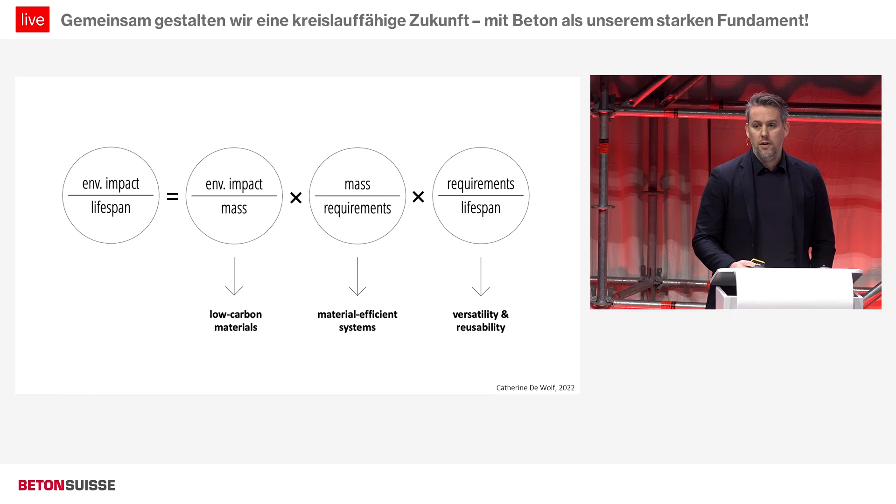It's also about how much material we need. There's a statement from my colleague at ETH that we should reduce by three-quarters, for example, in concrete. And the last point important to me is that we don't just do beam counting today, but that we really think of the end of life and the multiple lives of a building.

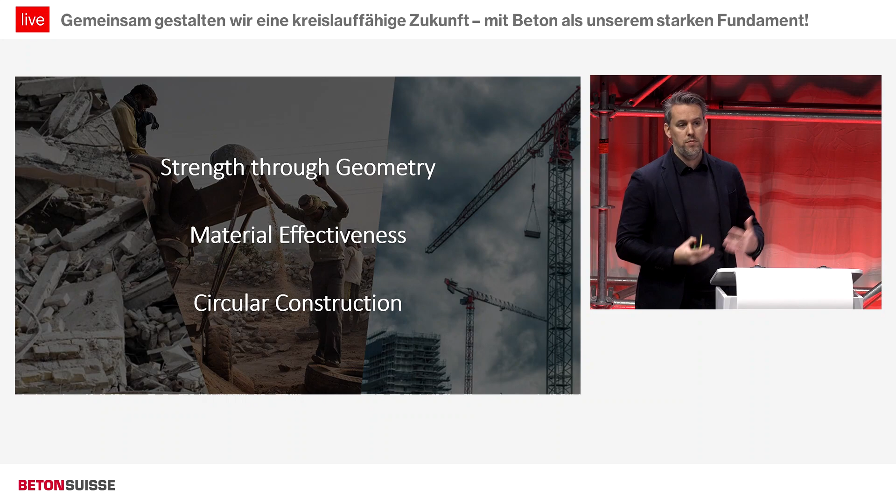That's also what Clemens has been talking about. How we've addressed this in our research group is through strength through geometry. You'll see what that means and why it makes sense for concrete construction. Material effectiveness, not material efficiency in the sense of lighter is better—if you achieve lighter with high impact, high emission materials, you're offsetting what you're doing.

And then the last one: I'll talk about how we achieve circular construction, very pure circular construction. So, strength through geometry—I'll first show you two projects that are actually masonry projects, but it will all come together, and you'll see that I was maybe talking from the beginning in concrete. So I work on this.

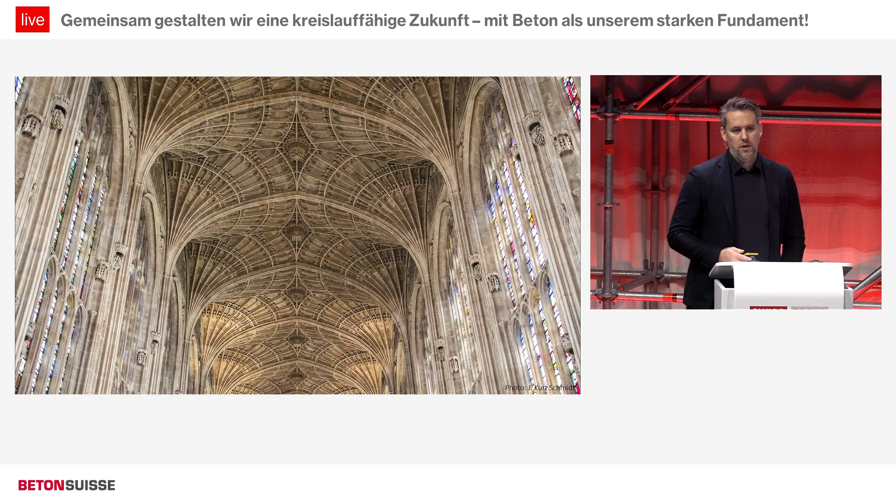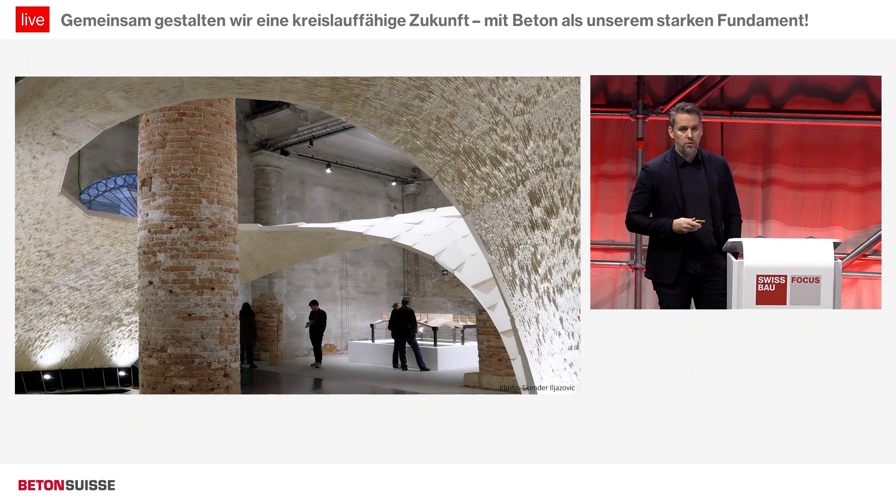I understand historic structures. I develop tools to understand why they're standing—they're literally as thin as an eggshell. And so we do projects like these. This was at the 2016 Venice Biennale, where we have 399 pieces of cut stone held together just because of their geometry—no glue, no mortar, no reinforcement. Very simple stones held together because they have the right geometry. So the first thing I want to say is indeed the beauty, but also the strength of geometry to really significantly reduce the mass, the amount of material needed to achieve a certain span.

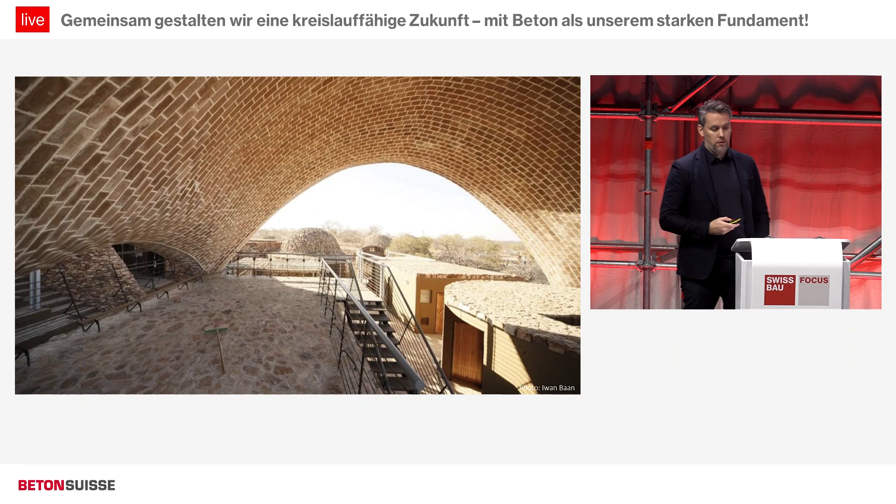A second project, where I did the engineering, from Peter Rich Architects in South Africa. This is a project out of soil, and these are 18-meter spans. What's special here is that we wanted to just use local materials and local resources, so local labor. We used the soil we found on site, added only 7% cement to stabilize that soil, and then did manual pressing so there was no energy put into the elements.

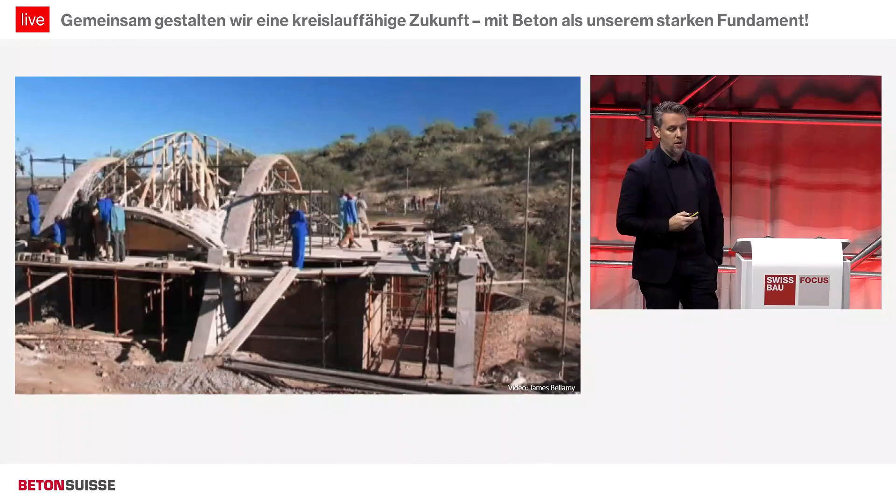What's interesting is that this technique we introduced didn't need any formwork or scaffolding, so we could use local labor. But the reason I'm talking about this project is the contrast between those two images. The elements, these bricks, are designed to only take 2 megapascals in compression—if you don't know what that means, it's 10 to 15 times less than a regular standard concrete in compression. But if you take one of those elements, you can just break it in bending in your hand. So you'd never consider this a structural material, which is why they have to be brought on site in very small packages.

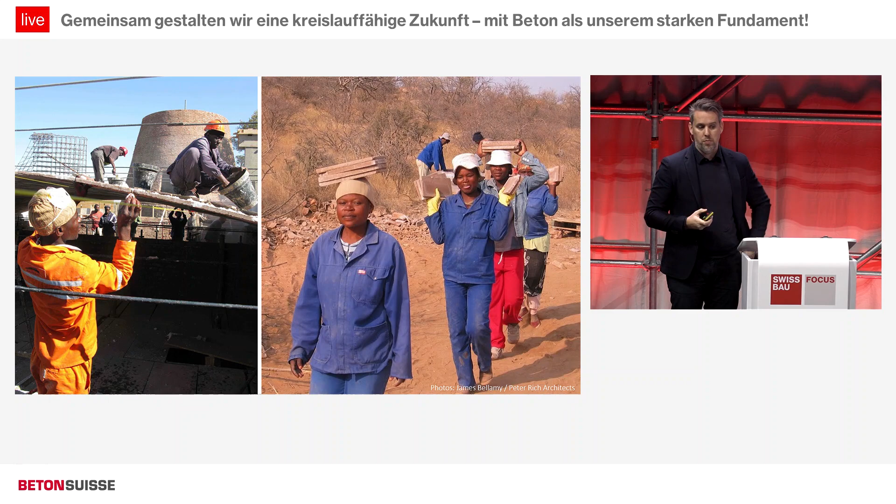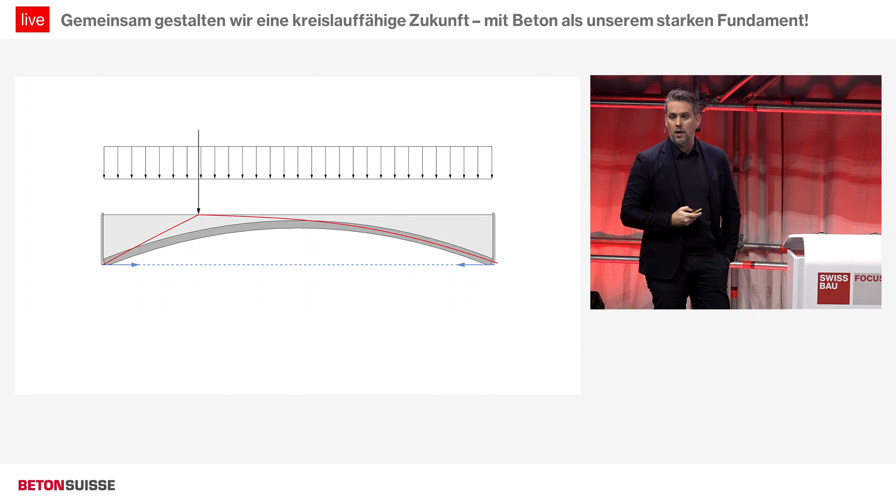And if you add a tension tie—why I'm showing you this is these historical systems that we see in our basements, in historic constructions—actually what we just did in the last 20 seconds is achieve an equivalent, 100% the same performance as a continuous reinforced concrete floor plate or slab, but one that uses 70% less material, right?

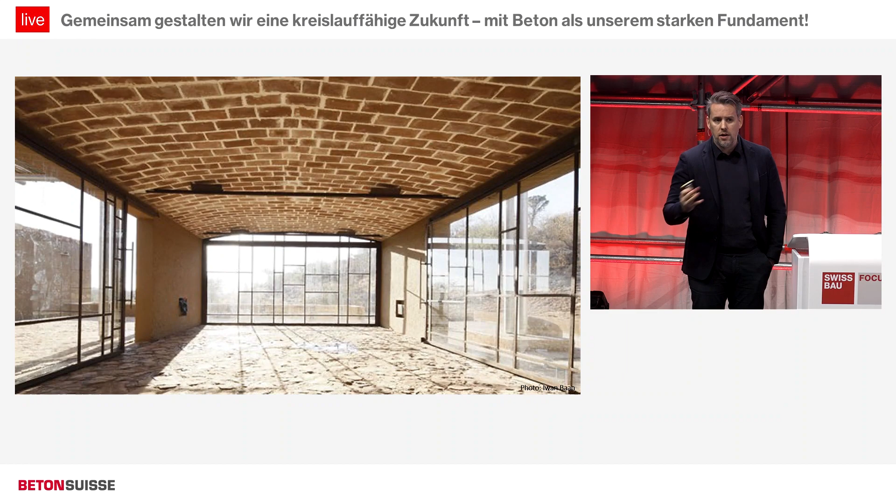So this is exciting. But the key thing here, why I wanted to show this project, is that if you get the geometry right—if you get strength through geometry—then basically you get very low stresses. You can actually activate low-strength materials, and these low-strength, recycled, or local materials are typically one-to-one: the stronger a material needs to be, the more stresses we have in it, the more carbon footprint that material has, right? So now we have two reasons to care about geometry.

We can at the same time reduce mass and reduce the stresses, so we can activate local recycled material very well. Another thing we are facing today—this is not my vision of the future, not my ideal scenario, but it's a reality—is that we are densifying, that we have to go taller.

So these kind of buildings, these medium high-rises, we see it also, for example, in Zurich. There's many towers, Wohnungsbau, and so on being built. When you look at these buildings, this to me as a structural designer was mind-blowing to learn, that actually if you look at the distribution of mass, of weight in this building, then 3/4 of this weight is in the structure. So totally absurd. The structure is there to keep itself up, not us, the users. We are part of what is called imposed loads. We, the users, are only 2% of the mass in that building.

If you then zoom in a bit more, you actually see that it's the floors, this element that we need to walk on, that is the most material intensive. That actually makes sense, right? Gravity comes down, columns are vertical, so they're perfectly aligned. We have decades of research on understanding how to brace our buildings very, very efficiently, so that is also perfect. But then I showed you that naturally the forces want to go to the supports like an arch, and we have a thin element, and this mismatch causes exactly this.

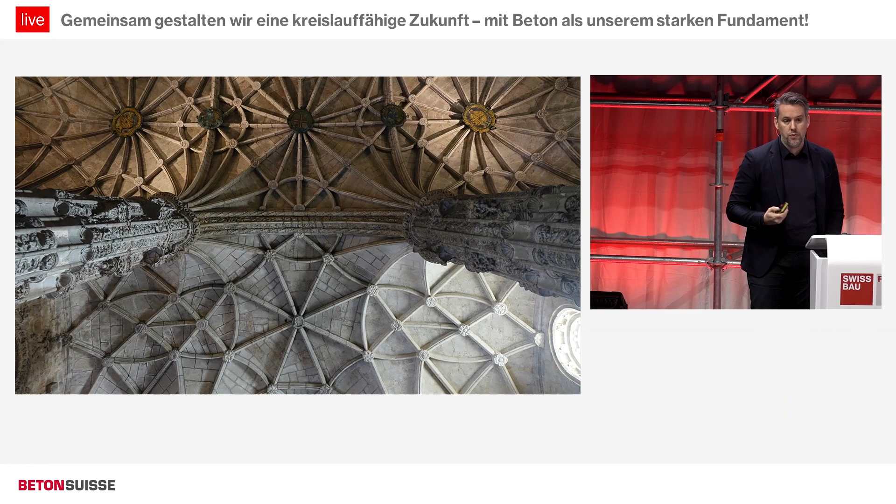And yes, this is what you get. So I focused on the weight, on the material savings earlier. But instead of forcing a material to be in a geometry that it naturally does not want to be as a compression-dominant material, but you reintroduce the natural, vernacular, historical kind of logical geometries, then you get this for free. This is only looking at the structures, so 70% of concrete you could reduce and 90% of steel. So it's not about changing materials, it's actually about listening to what the material wants to do and how to use it best.

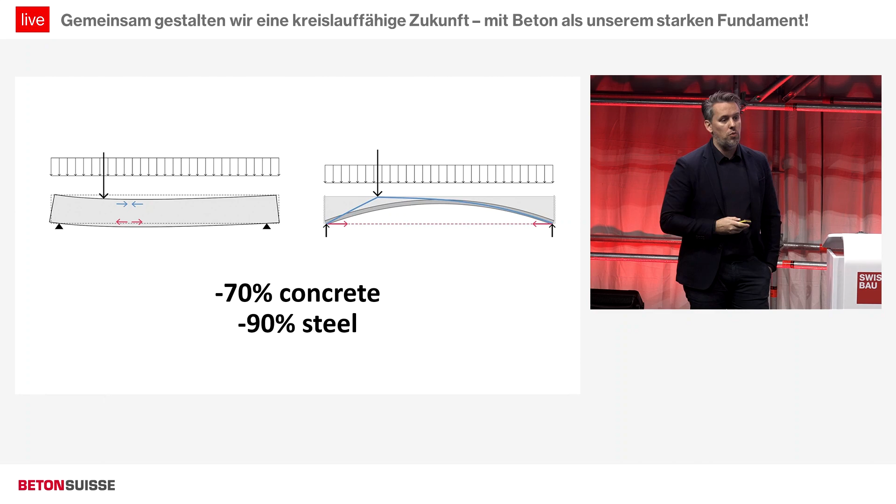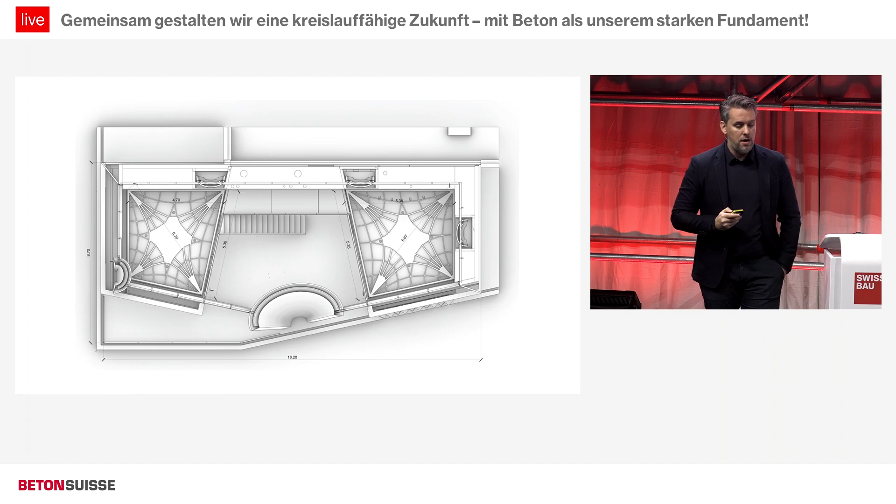And when you visit, then you learn about these floors. You heard about how we call the floors, the Rippmann floor system. So in this specific unit, you can go visit it in Dubendorf at Nest, is 5 by 5 meter spans. But what's exciting is that the structural thickness of the floor is only 3 centimeters. More, it's 3 centimeters of low strength, unreinforced concrete with more than 50% of recycled content in this floor, right? So 3 centimeters. So I hope you go visit Nest, and when you're walking on top, realize again that you're walking on almost no material.

All right, so this is a nice project. We were very proud. It looks neat and so on, but it was still in a bubble. It was still done in very special conditions. The reason why I passionately talk about these kind of concepts is, let's go back to this picture. And let's indeed look at what we have here. We already talked about 40% of the mass is basically in the floors, right?

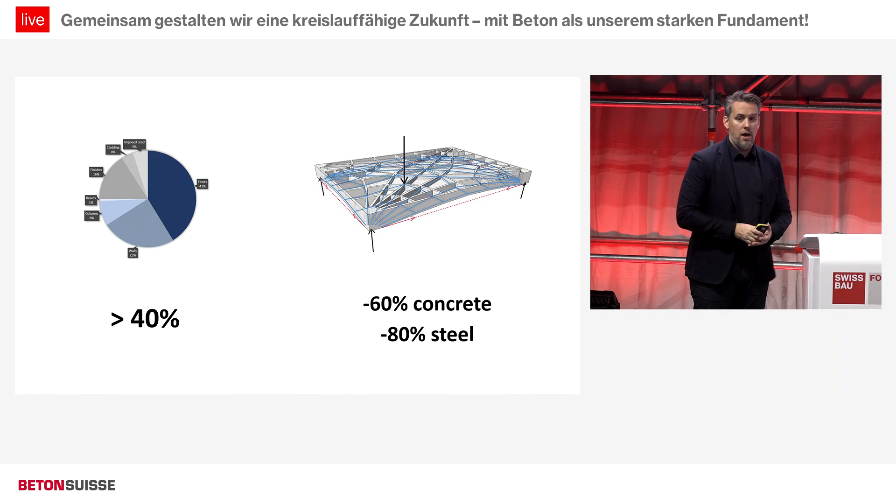So that is a lot of improvement to do by just optimizing one element. We will then also have the benefits on the right. You see it's not 70-90 because this is a medium high-rise, so we have fire safety requirement, we have acoustical requirements and things like that, so we add a little bit more material back into the project. So what would happen if you use the principle that I'm sharing with you today instead of your standard reinforced concrete floor plate? You would save on this one building 7,500 cubic meters of concrete, which translates to 1,200 concrete trucks that would not have to go to this one building site.

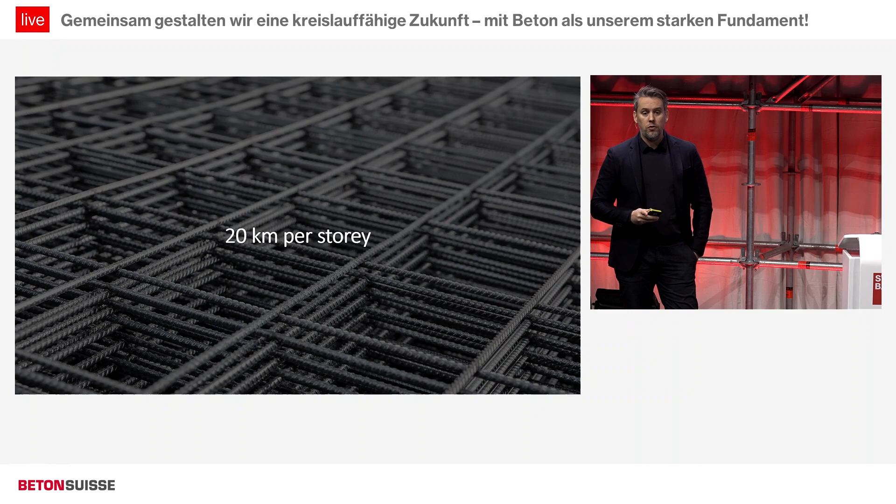But also per floor, you would save, and this really becomes the bottleneck, 20 kilometers of reinforcement steel, which nicely and coincidentally rolls out from Zurich all the way to Brussels for one building, right? I happily live and work in Zurich, but I'm very proudly from Brussels as well, so maybe you can tell where the example comes from.

All right, but in the beginning I said, let's not get carried away. It's not about material. So for example, all saying that wood is the solution and concrete not, it's absurd. It's 3 bubbles that we have to equally balance. The same here, I should not be excited about the volumes. What really matters is the combination between the material, how much material we use, the M, and what the impact is of the material.

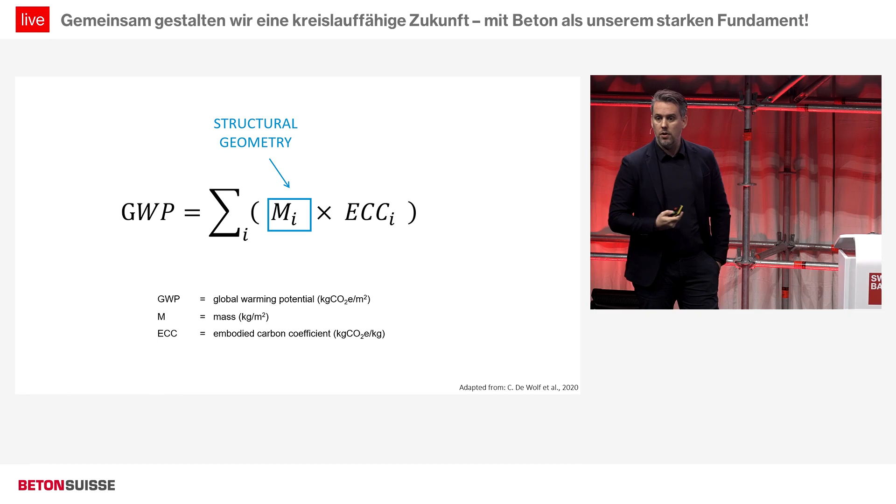So how does this work for what I've been showing here? So the structural geometry directly gives you this cut. Remember the stone vault that I showed you. But also, we can use better materials, and so actually getting the geometry right gives you that as well. And then, of course, I collaborate, indeed a long-term collaboration with Holcim, to get the best materials, to add that on top of that, so that we really also have the best material possible. So for our floors, this is how it looks like.

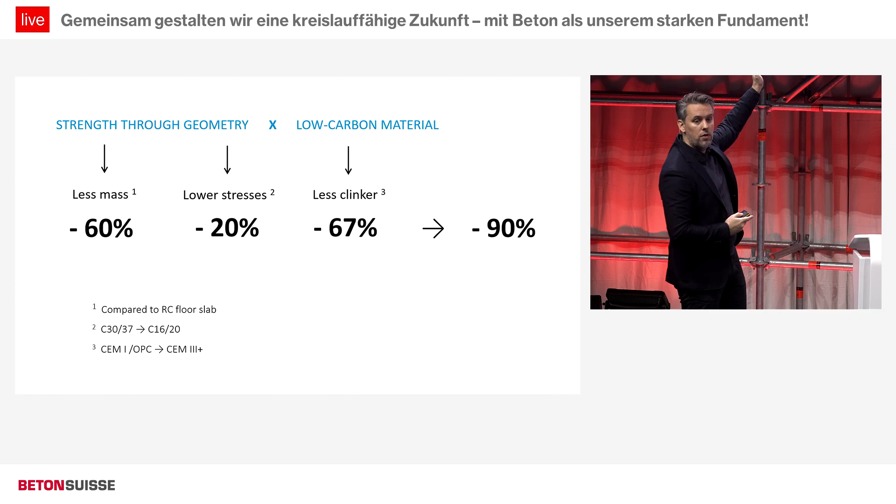So strength through geometry, so getting the right geometry, compression geometry for this compression-dominant material, gives you directly the mass cut, but also in our projects, we use lower strength concretes. And look what happens when you go from a C30 to a C16. You have an additional 20% of savings, and then state-of-the-art today in concretes that have less clinker in their cement, we can easily get an additional 2/3 on the material level.

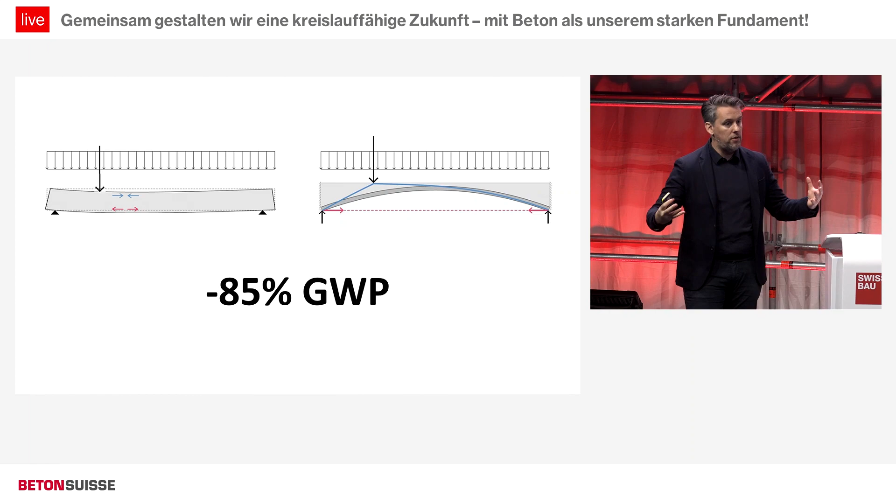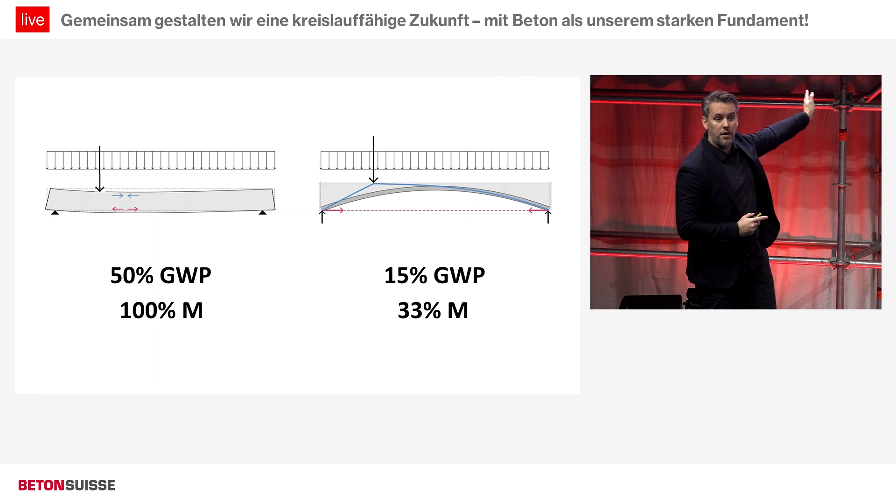So that means that what I'm presenting is not like a small kind of benefit. Even though we save only 60% of the weight of the building, we basically have 85% of the global warming potential reduced. So this is getting exciting, right? This is really changing the needle, and we're doing it with this exciting material indeed. So here also to emphasize again, if we would just change the material, then of course this is still nice, a 50% improvement, but all the rest stays the same. The volume stays the same, the mass stays the same.

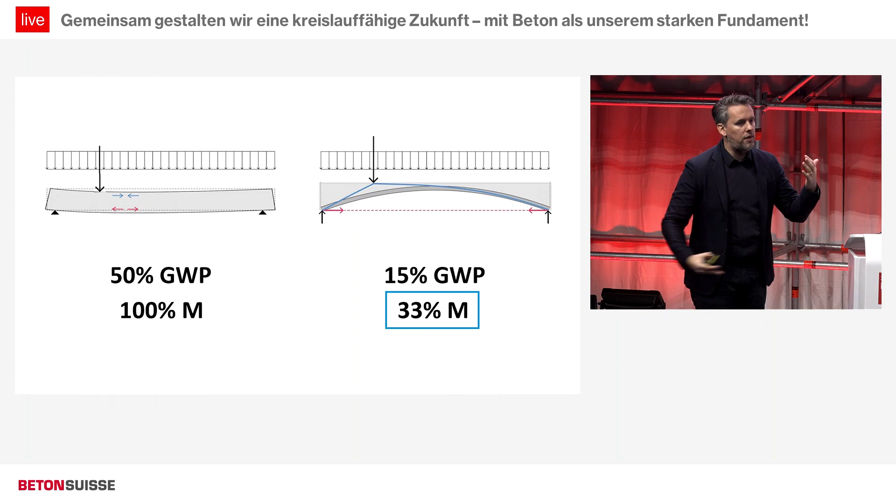And that is actually a key thing, because sustainability typically means automatically it's more expensive. But here, because we have these gigantic savings in weight, that means smaller columns, smaller foundations, so all the savings in the rest of the building make it that we can offer all of this sustainability at cost neutral for the investors, the clients. So that is starting to get exciting, and that is, at the end of the day, typically what really matters. All right, let's now go to circular construction and bring it all together.

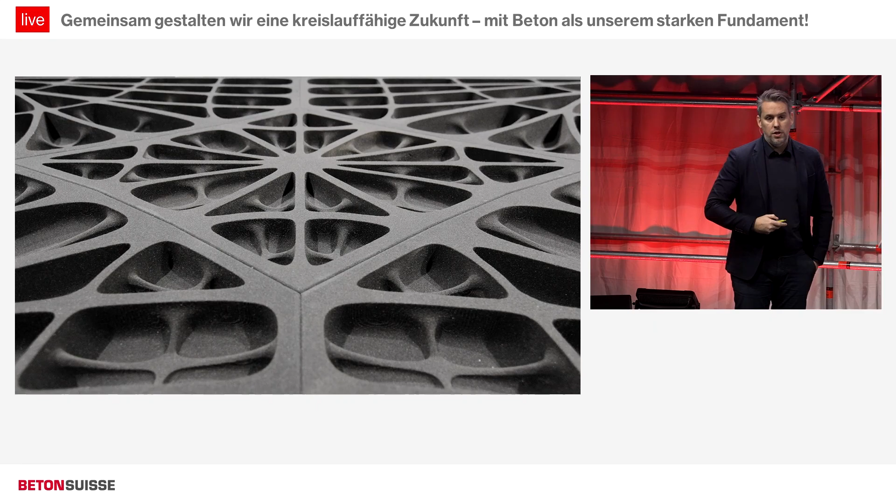So in the HiLo project, we did it in a one-off, so now we're developing this discrete floor plate, which is called the rib-vault floor system. It's prefabricated, so that it's easy and fast to install, so you can make some money there as well. As I mentioned, we can use low-strength, low-carbon concrete. What is also important here is that we are very disciplined in separating the materials, meaning that if we cannot just reuse the elements, we can easily recycle it. Why am I even talking about reusing? That is because we put the elements together as easily as a masonry system, so you can take it apart as well.

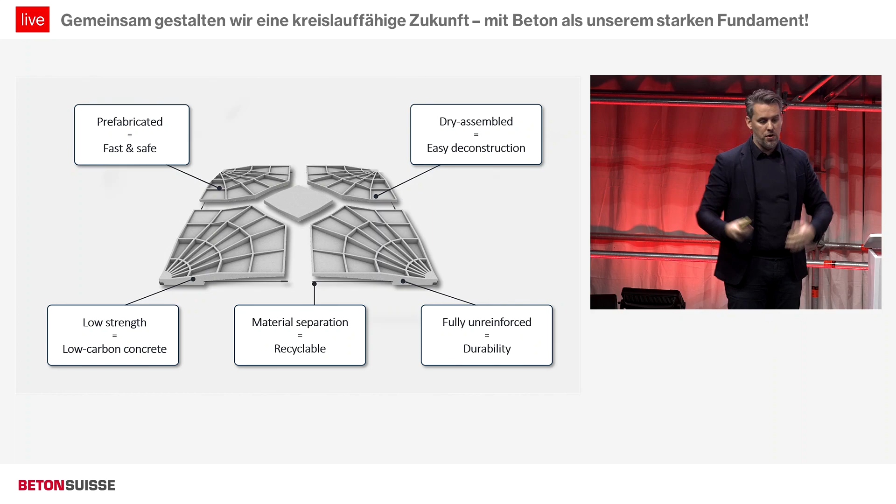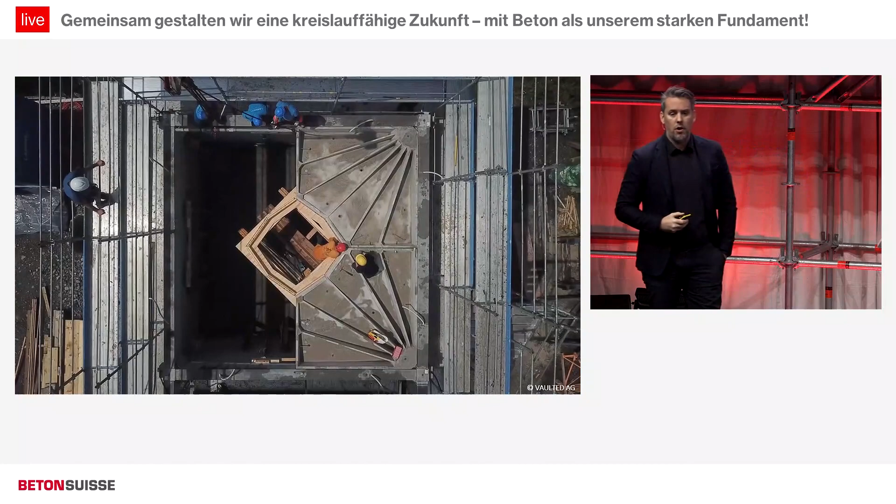All right, so this is how the early prototypes looked, but now with the ETH spin-off Vaulted, we are commercializing this, and we have already 4 active projects here in Switzerland, and I will show you one. This project, this is actually a mock-up, a full-scale mock-up, so not a prototype, a one-to-one test run for the building. This is for the Creatower 1 project by Tech Cluster Zug in Zug. The architects are Gigon Guyer, engineers Walt and Galmarini.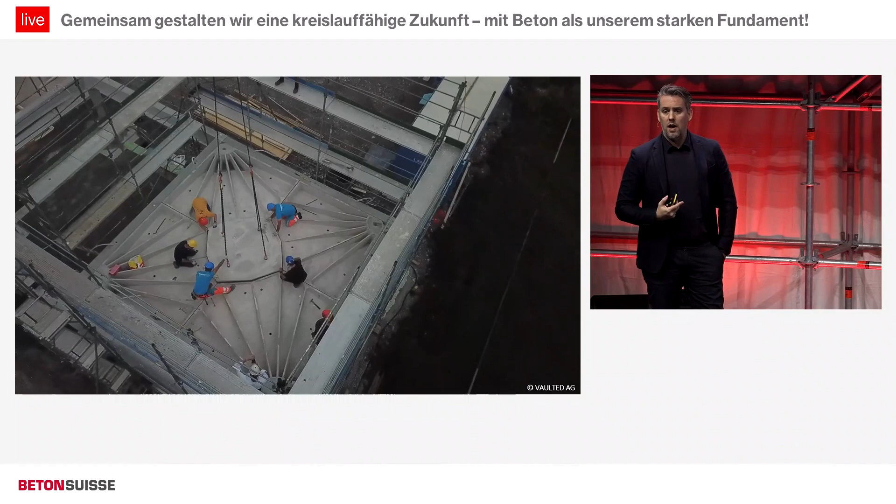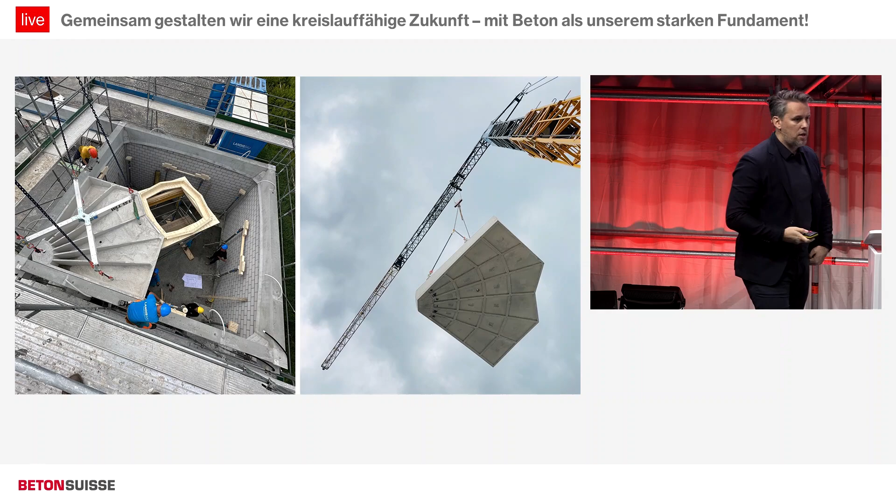So here you see these elements that have been designed, engineered, fabricated, and brought on site by Vaulted, being installed very simply, click in place, and per bay, to give you a sense, we need under 2 hours, between 1.5 and 2 hours, to just click it in place and you move to the next site. So here you see some images further. So we come on site, we have these lifting kits. Any contractor can do it. This looks complicated, but it's banally simple because it comes together naturally, like a 3D puzzle that is made to fit nicely on site.

So here you see then with these anchors, we really keep everything separate so that we have full reversibility, full recyclability, full reusability if you want. So this is then how it looks like. What was great about the client here in Zug is that we did all possible tests.

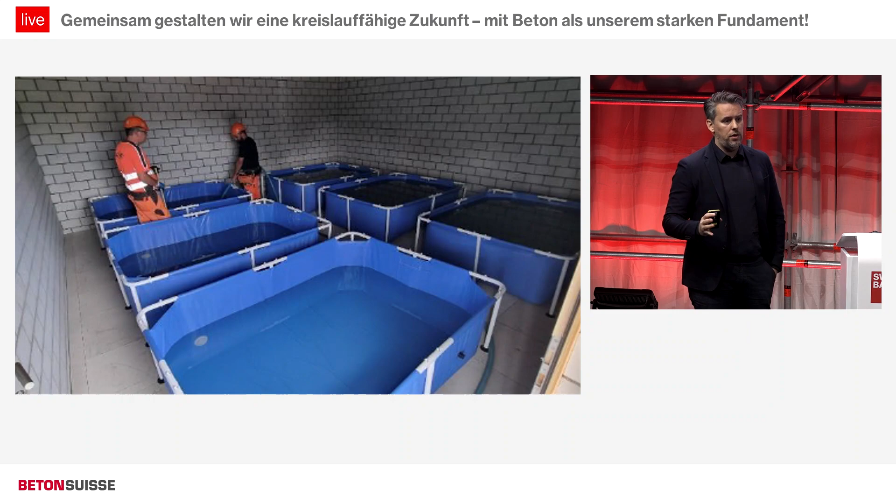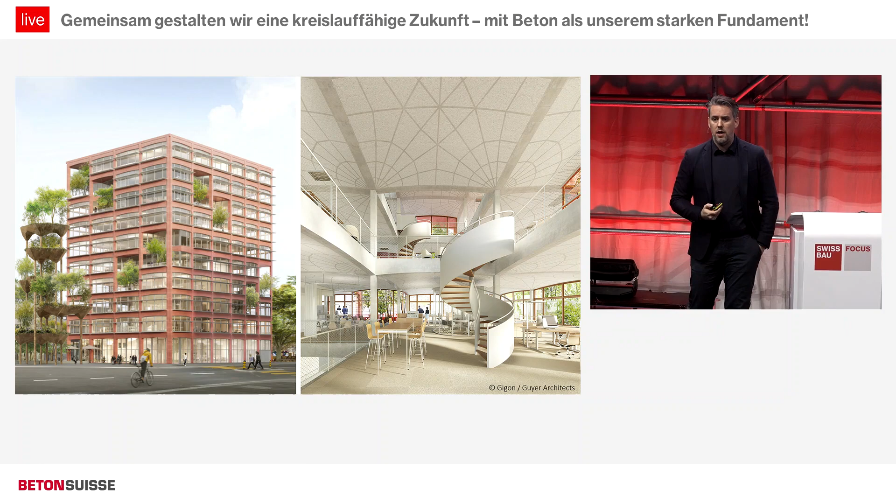So I don't think that any of your buildings have been tested as much as we had to test this mock-up. We did load tests, we did fire tests, we calibrated the acoustical performance and so on. So everything passed the hardest kind of requirements, and this is then how it looks like from below. So super exciting. This was a competition entry. This is how it will look like. I'm excited that this is coming in Zug.

Okay, let's click through this. Again, why am I so passionate about this? It's because there is a lot of benefit to be done. If you look at this image, isn't it crazy to imagine that 40% of the weight is in this super simple element? That is where we need to innovate.

So, ja, ich fange dann an. Also wie gesagt, I will speak in English. I think it's easier for me. So thank you for the introduction, and I'm here also to talk about why concrete has to stay. I think it's a wonderful material, and it's a material that we need to deal with in the many years to come. And the reason is that the global building floor area is expected to at least double by 2060. And we know that 85% of those buildings are going to be built from concrete.

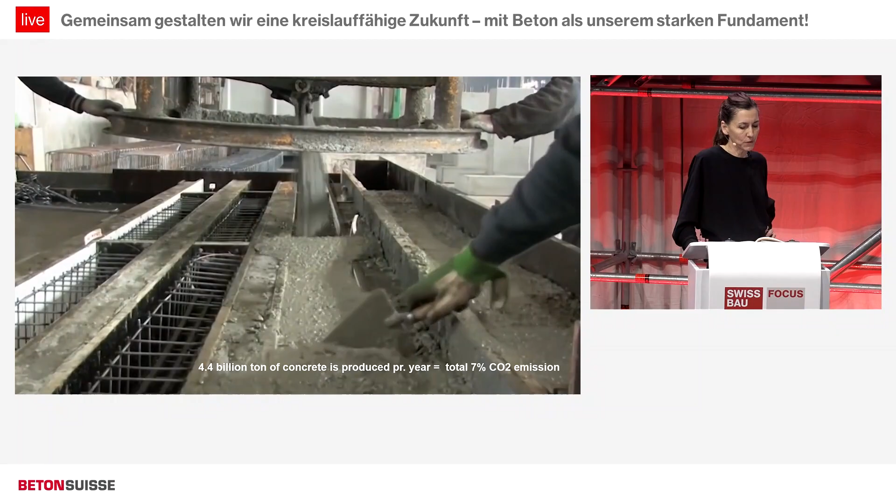This makes concrete responsible for 7% of the global CO2 emissions. And if concrete were a country, then it would be the third largest emitter in the world after China and the US. So we do need to find ways to use less of this material, and we've indeed seen methods from Philippe Block how this can be done. But of course, not one thing fits all, so we have other possibilities to look into.

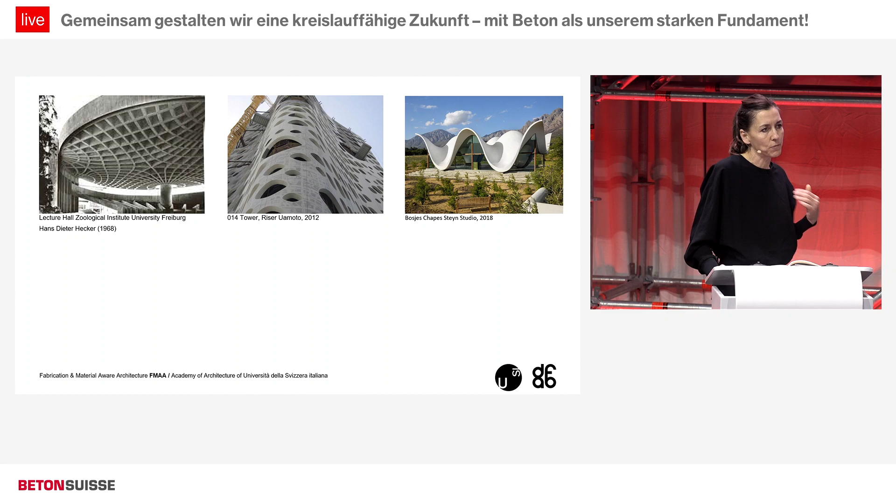Again, we also know that there have been a lot of efforts in the past to look into how we can actually reduce the amount of concrete used in buildings. These are examples. However, building these typically requires a lot of complex formwork. And these formworks typically also generate a lot of waste, and waste in Switzerland is something we are exporting on a daily basis. So we also need to figure out ways to reduce the waste production from the concrete industry, which is actually responsible for 84% of the overall waste production in Switzerland.

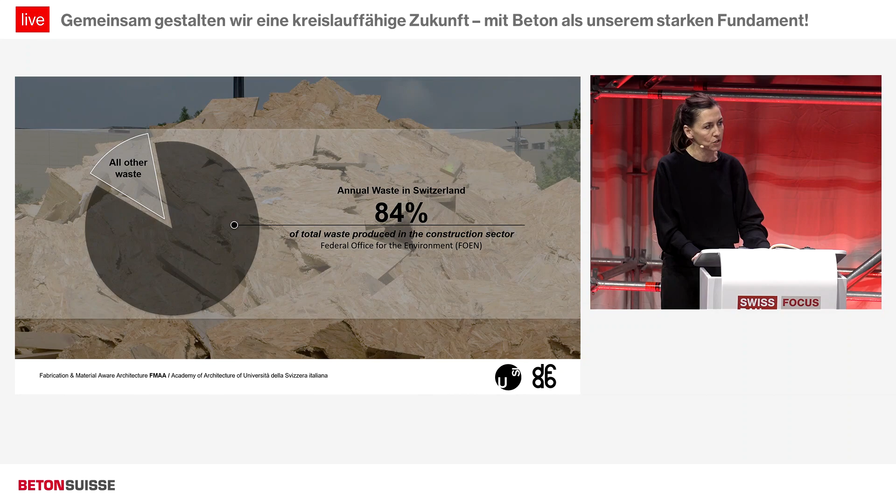In fact, right now we are wasting 500 kilograms per second. So while I've been saying this, we actually threw away the equivalent of a baby whale. So over the years, in my research at the ETH in Zurich and now at the Università della Svizzera italiana in the south of Switzerland, we're looking into methods of how we can rethink formwork for concrete. So what would be ways to shape this material generating less waste and still optimizing the shapes?

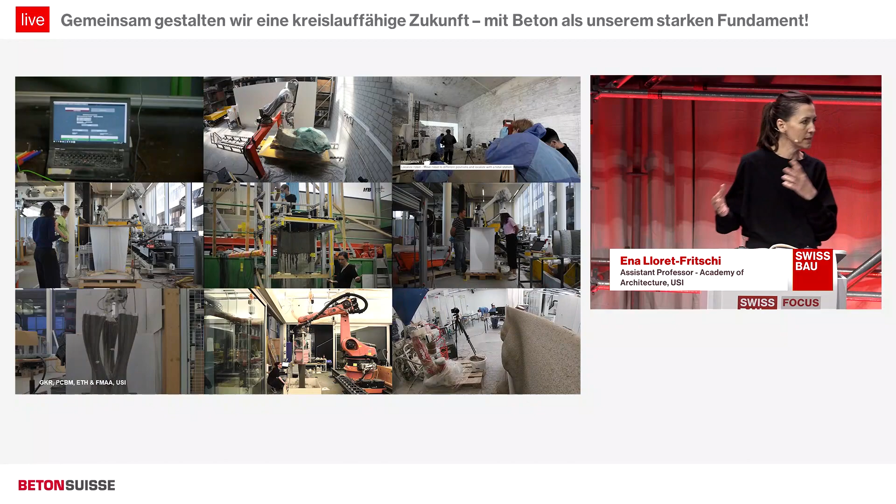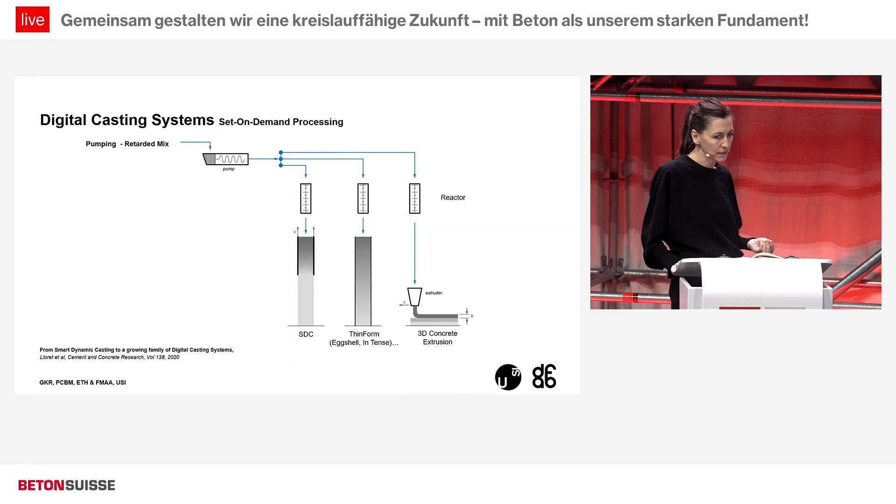And we do this through a special concrete processing system where we have a pump where we add a so-called retarded concrete mix. This we then accelerate inside what we call an accelerated inline mixer, where we add a small amount of hardening agent. This allows us to control the concrete on the fly during production and to actually shape concrete as we would like to.

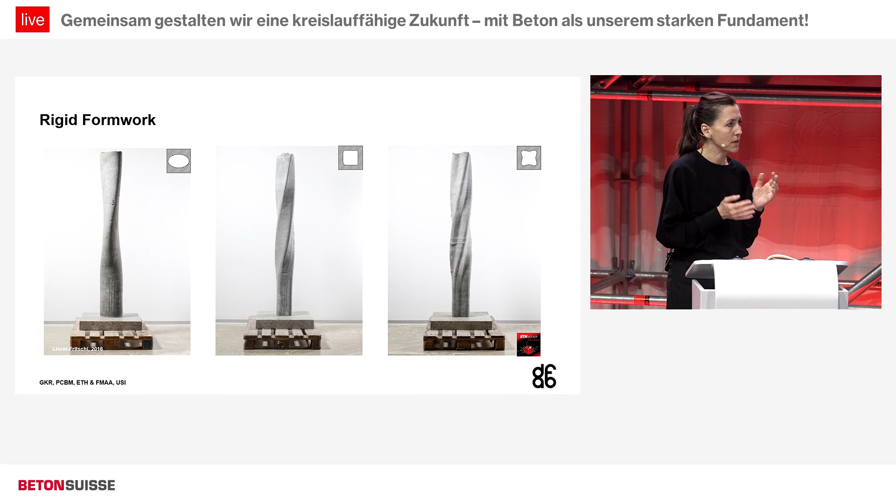And here are some of the first examples that we did where we were able to shape concrete while it was transiting from a soft to a hard material. And here you see a torsion of the concrete that is probably the most evil thing you can do to this material. However, it works really as if you would be shaping a pottery piece of clay.

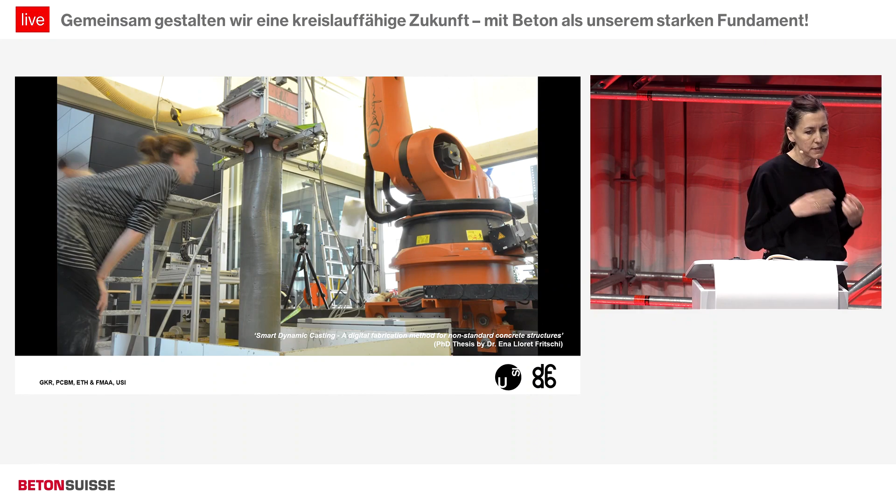You see here how we did some tests with what we call the local shaping formwork to understand if we could start to actually shape the material as it's changing from soft to hard and decide exactly where the material should be while we were doing so. A number of problems occurred.

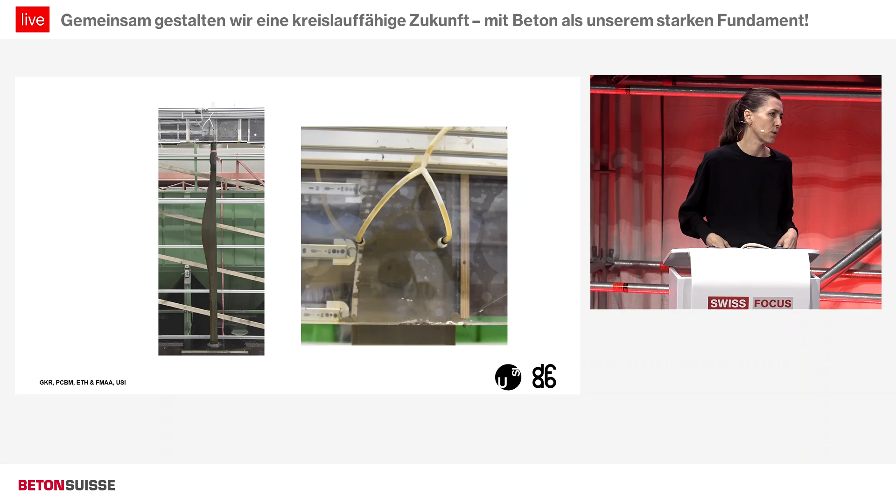However, we went on with the same concept and developed what we call the global shaping formwork, which was then further developed to be implemented as one of the innovation projects in the NEST EMPA in Dübendorf, where we could actually use this global shaping formwork to make structurally optimized facade mullions for the facade that use 30% less material.

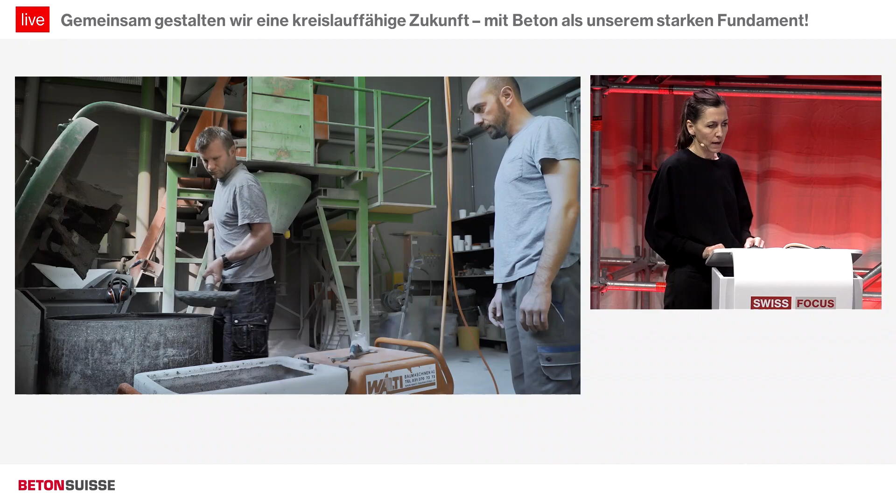And here you see how we're producing them by using the retarded concrete that is mixed in an ordinary concrete mixing pump, and then it's placed inside of the inline mixer. In this case, this was a mock-up that we had at the lab at the ETH in Zurich, and you see how the accelerated material is then flowing into the formwork, and this is done in a speed that is set to the hydration of the material as it comes out.

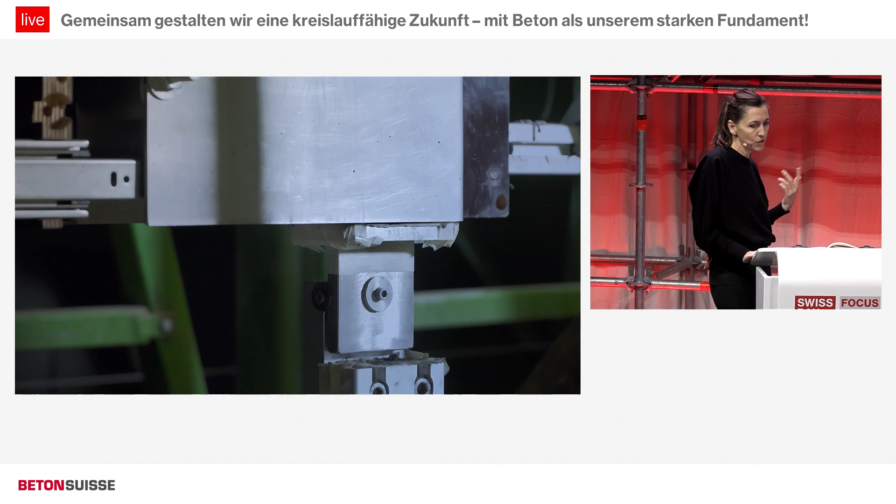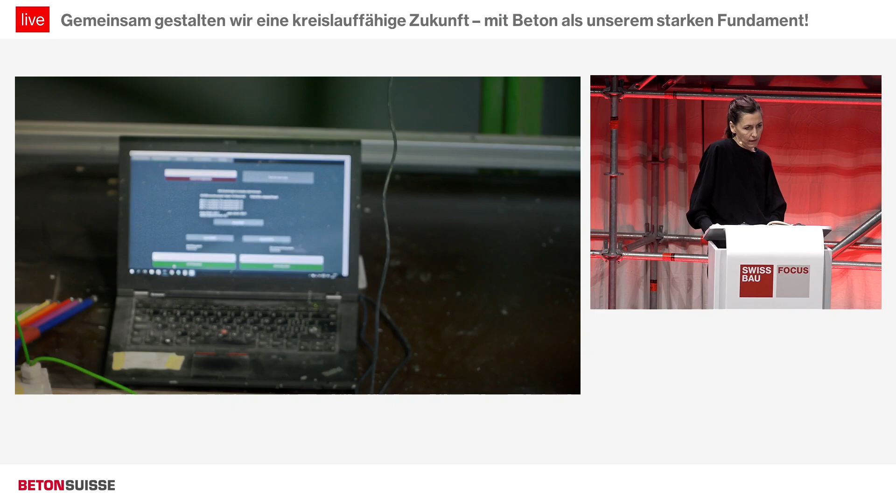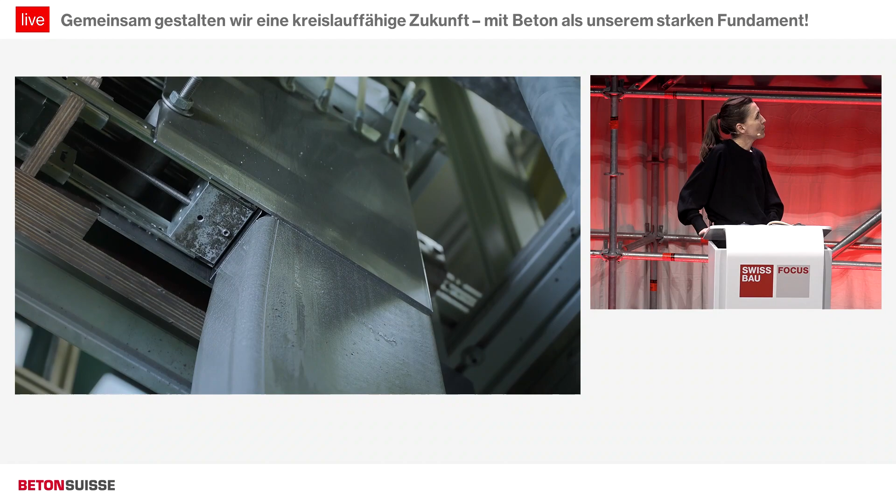So here you see the finished product coming out of the formwork, so it's in a way just a simple slip forming process that is scaled down to prefabrication. And of course, all of this has been customized and set up. And currently, as we speak, we are also implementing this with the industry at Müller-Steinag. So the process will continue to go.

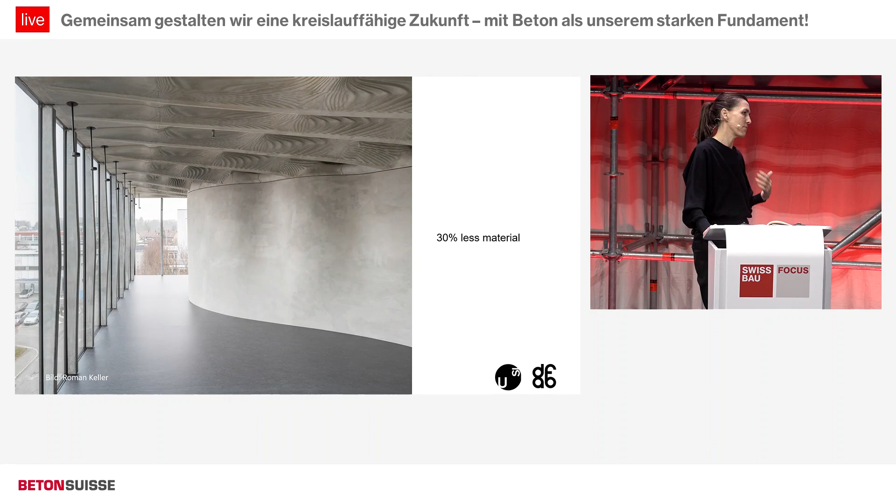Finally, we installed these mullions at the DFAB house, and there were 15 different optimized mullions. So every single one of these mullions is slightly optimized in its material use, because the bandwidth of the windows was different across the entire facade structure. And with a single formwork, we were able to optimize every single mullion without any cost or without any extra formwork.

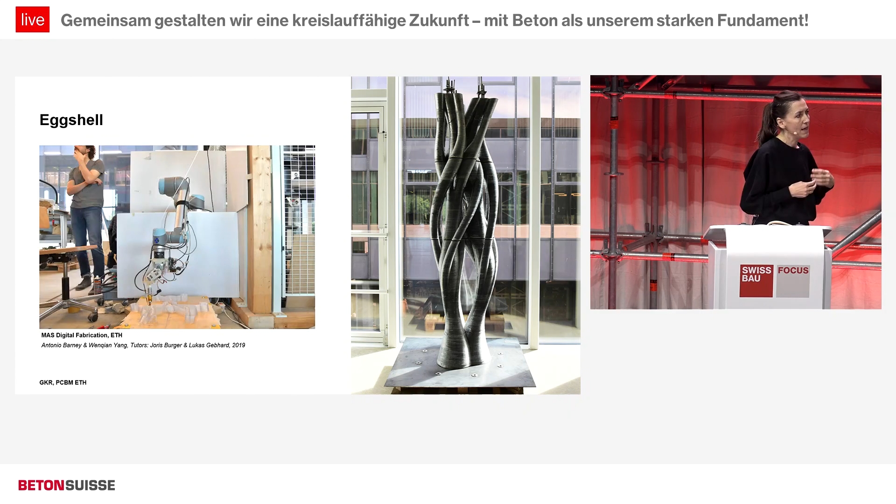So, of course, the SDC process has its own constraints. So we went on and we innovated further with this idea of controlling the hydration of the concrete on the fly of production. So here you see a first prototype of the eggshell where we are 3D printing a very, very thin eggshell-like formwork that then is filled with this set-on-demand concrete that has no hydrostatic pressure on the material or on the formwork itself.

And you can see we could produce this very, let's say, extravagant shape to just emphasize the fact that we have an extreme freedom of shape if we start using very thin formworks with a controlled hydration.

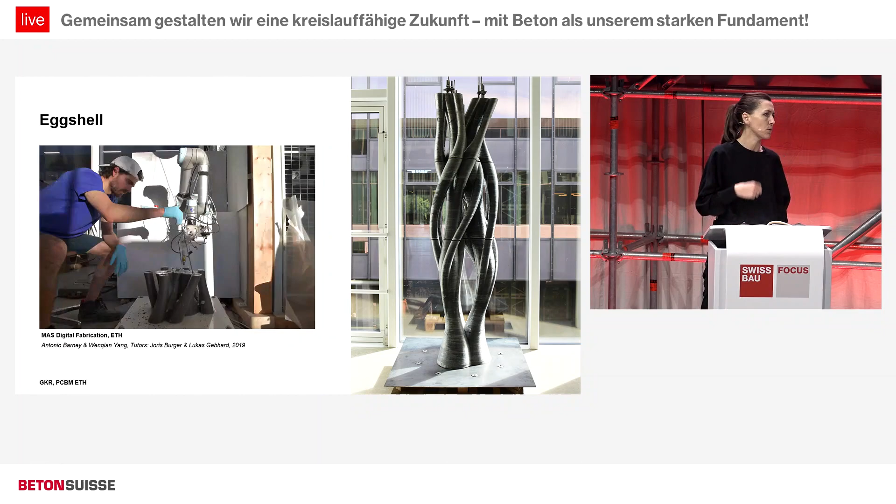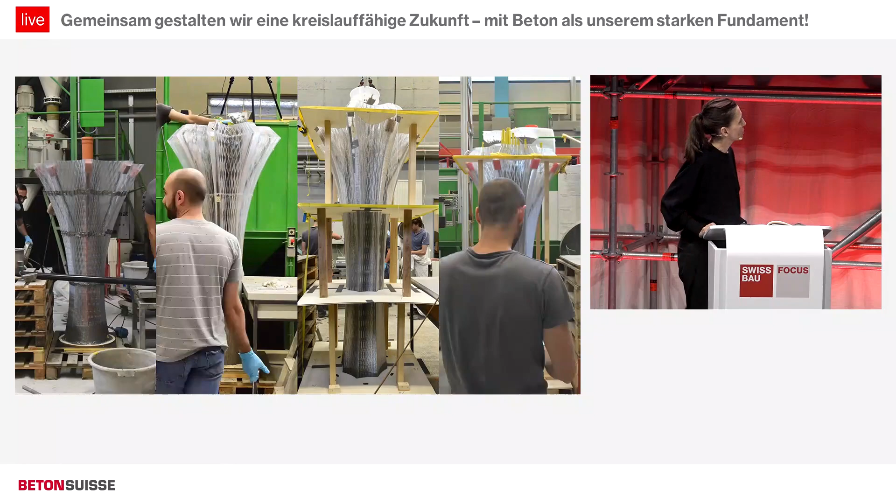Again, we brought this on as one example to the demonstrator project and R&D with Basler Hofmann, where we produced this one column that was produced over an iteration of tests where we optimized the geometry along with the reinforcement, and again with the formwork strategy itself, and the filling process here was done manually due to the size dimensions of the product that we were producing.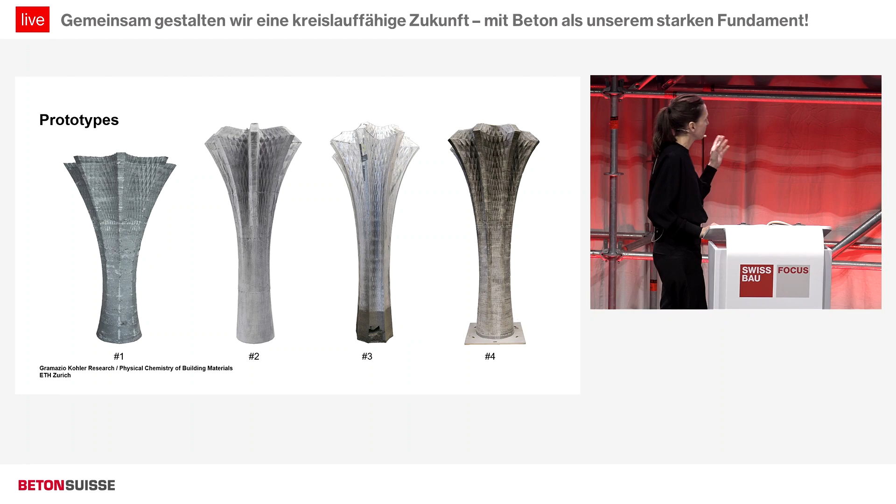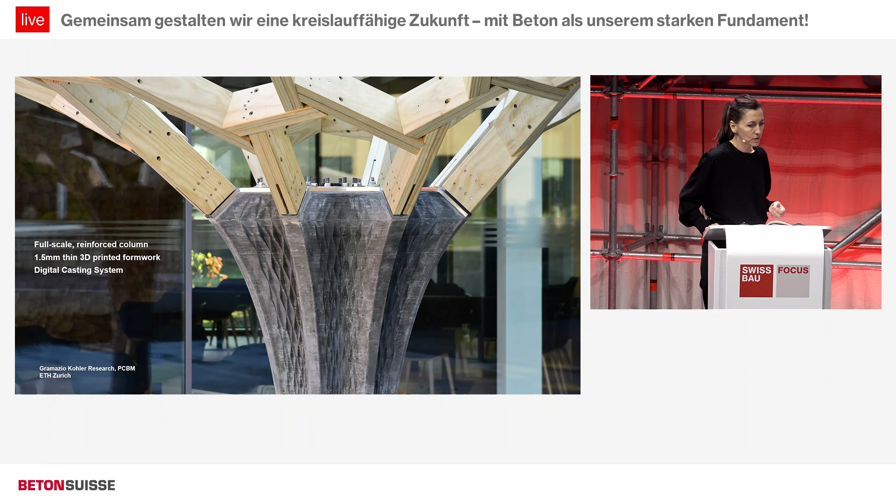Of course, this was a longer journey of 1 year of research development that then finally enabled us to produce a single, very, very thin formwork with reinforcement and concrete as a final product inside. And then you see the final product here as it's installed, and it's showing how we can use a full-scale reinforced column with 1.5 millimeter thin formwork to 3D print this material optimized shape.

Then we go on. What can we do when we can control hydration? We can even think further about what a formwork will look like in the future, because we, of course, need to think about this waste production that I was talking about in the beginning. So why not use paper? It's very cheap, it's recyclable, and it's also easy to put into shape.

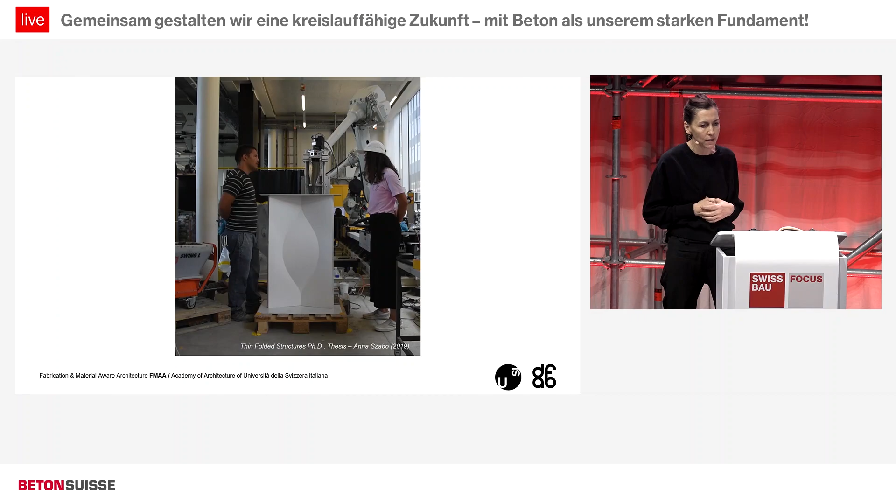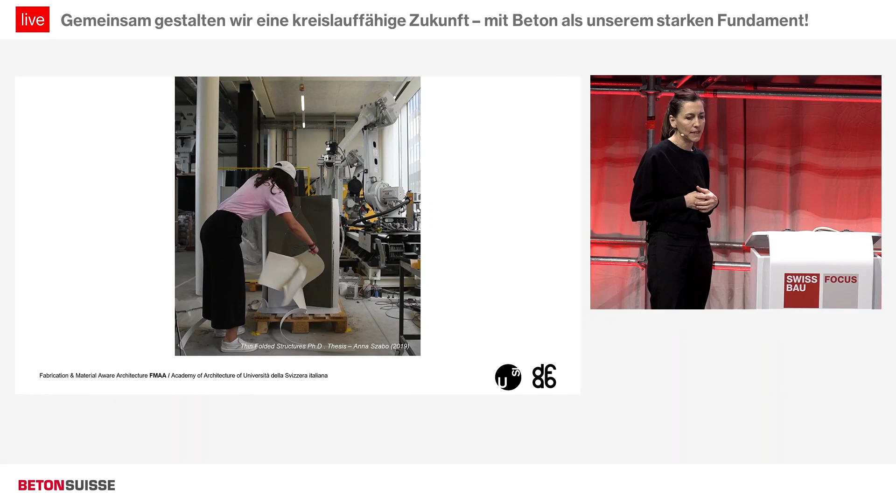So we started doing a test series together with colleagues also from the United States, more specifically Joseph Choma, within one of the PhD's work, Anna Szabo, at the ETH. And here we tested again the set on demand with a very, very thin piece of paper, and you see how she's peeling it off. An absolutely magic moment to see that this is actually holding on to everything. So we can completely rethink what we do in the future.

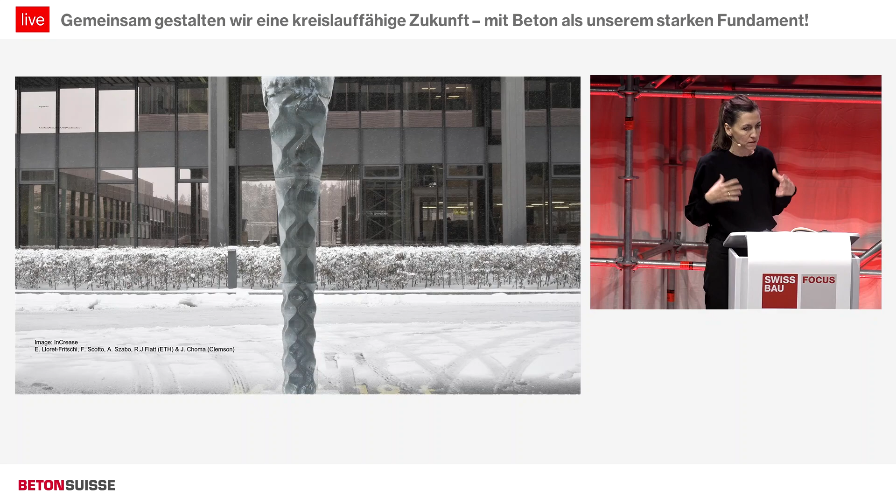However, of course, we also want to go further, and we also want to structurally optimize, as it's very needed that we reduce the amount of materials. So what we are currently looking at is what we call FoldCrete, which is a paper-based mold for concrete construction. And we take the idea of paper a step further into a flat surface structure. And here we look at customizing the design, and again, using the paper to use 50% less concrete with a low cost and recyclable material.

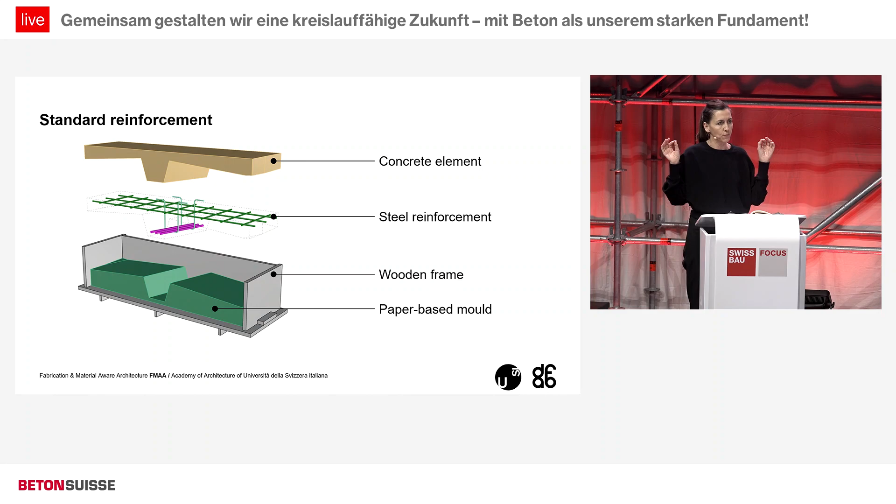We've developed a strategy how to cast these structures with conventional reinforcement and with a very conventional method that is going to be tested in industry in the next week, where we take the normal wooden formworks and we place our paper inside, and then we cast in an ordinary way. We've developed a design and digital cutting tools at the university. We can fold the paper and we can cast with an ordinary concrete or even a low-carbon concrete, as we've developed specifically for this case, that uses 13% less of carbon emissions.

So if we would have had FoldCrete for the Prime Tower at the time it was built, we could save up to 50% of material. And finally, I would like to also emphasize that with FoldCrete, we're together with Fabio Amicarelli. We have a co-founder from the business and finances that is on board together with a structural engineer and myself, starting with a spin-off that just won the award for best innovation in the south of Switzerland.

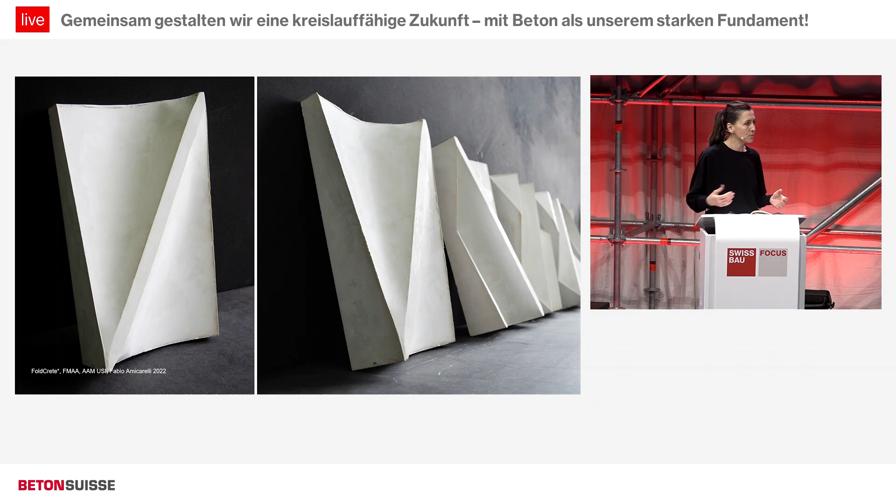And of course, to move on to how we can actually use paper to save concrete in the next years to come. So with this, I would say thank you for your attention.